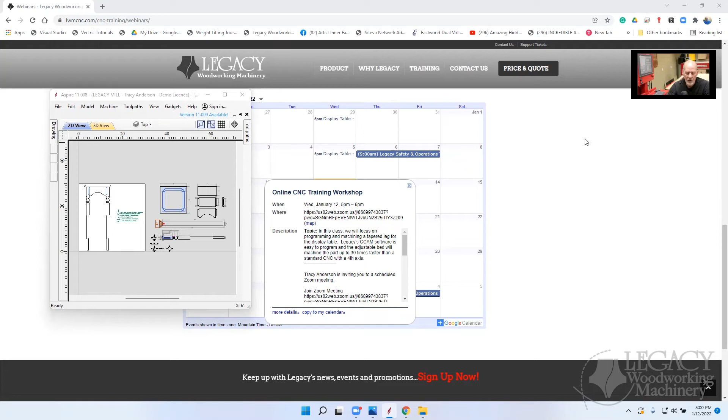Let's start by opening our drawing, which I saved as a DXF file. Let me check the class review page - right here in the last class, class number 3. This says 3 of 3, but actually these need to be retitled as 1 of 5, 2 of 5, 3 of 5. We're on 4 of 5 tonight. On 3 of 5 is the display table DXF file, so you can open this up in any CAD program.

The display table CRV file is in the latest version of VCarve Pro, so some people couldn't open it, so we do have a DXF that'll work for you. I've also got an export here, but I wouldn't bother downloading this one now, because I'll download a new export for the next class that has everything we do up to tonight's class. So let's go ahead and take a look at the project.

Just to recap what we've done so far: we focused first on the joinery, where we machined the square end and cut the mortises, showing off the mirroring capabilities in CCAM Pro that Mike put together for us. We've also worked on the tenons here on the rails, and did an overall drawing and setup, establishing the program to begin with in CCAM Pro.

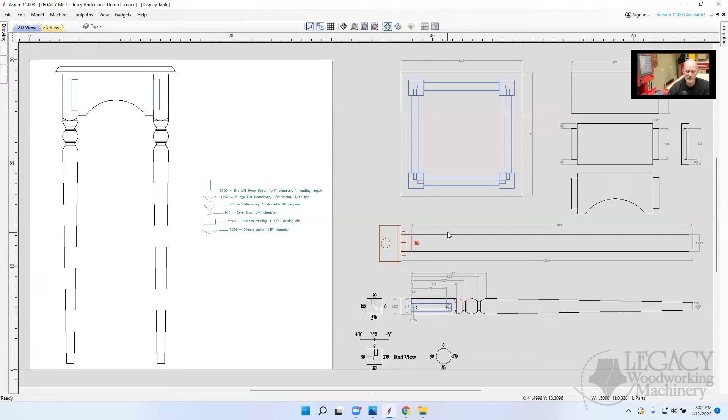Tonight we're going to follow through with the turning, doing the lamb's tongue and the bead here at the top, and then a taper. We're just going to focus on that tonight, and in the next class we'll come back and import files for cutting the arches and maybe even the tabletop, so everything will be organized into the project in CCAM Pro.

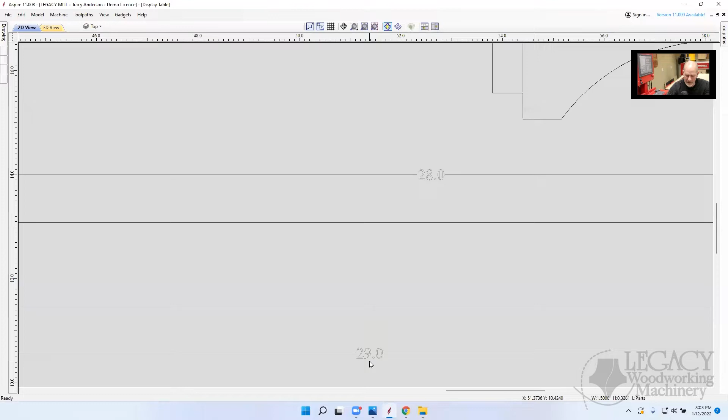Just a reminder that this is a drawing of the 4-jaw chuck and the blank, and I've moved the X0 from the end of the blank, not the jaws, out 1 inch. In this case it says 28 inches from end to end, but the part is actually 29, so we're making it 1 inch longer, we'll burn that inch, and cut it off.

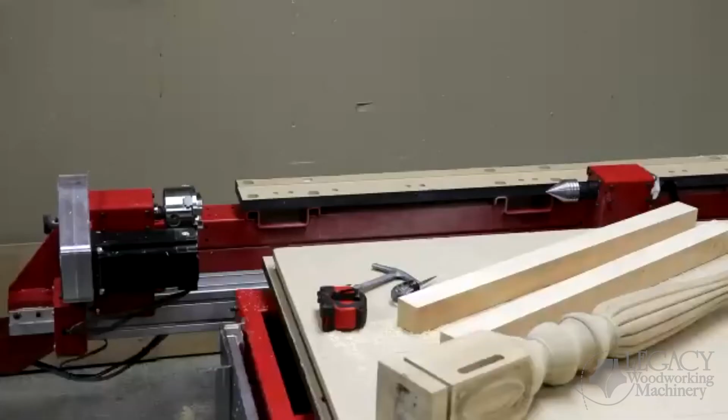Now I'll show you real quickly - unfortunately for tonight's class, let me stop sharing real quickly. You can see the part here, and this is just a couple sample blanks I had that we're doing all our testing on.

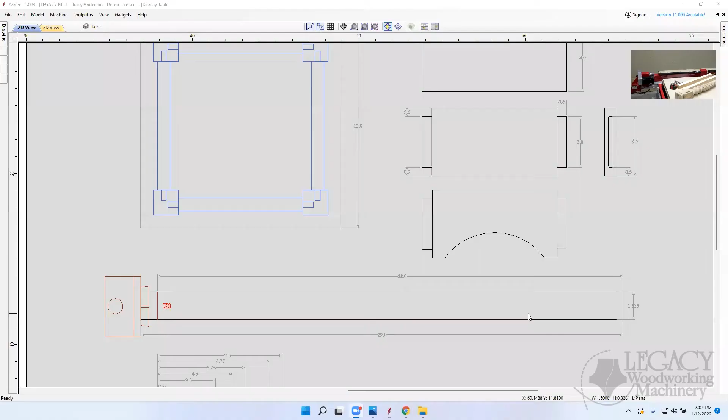So I'm going to measure that - it's about 26 and a quarter inches long. We're going to test everything on this part tonight based on 26¼ minus an inch, so we'll say it's 25¼ instead of the full 28. That's the leg, this is a sample leg, it's going to be shorter, but that's okay for demonstration and testing purposes. Once we get everything worked out, we'll come back and make this out of something like walnut or a nice hardwood.

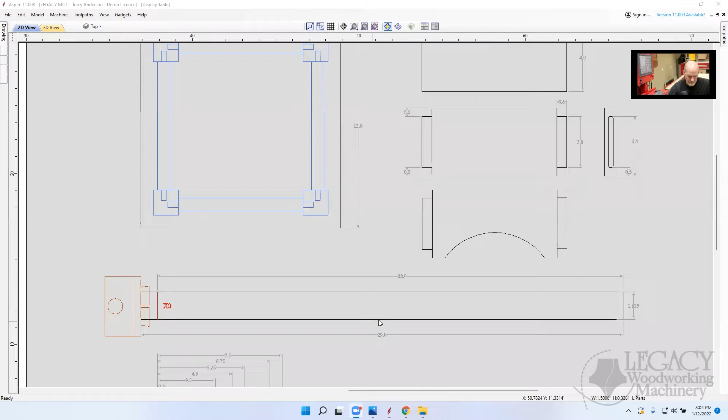Let's go ahead and take a look at the drawing right here. I apologize, this mouse is way over responsive, it's going to drive me crazy. Go into Windows settings and change the sensitivity of your mouse - yeah, I'll have to do that, but I'm not going to waste time on it right now. I'll fix it before we do this again.

So here's what you remember from class number 2: we machined from 0 down to 7.5, this end right here, machined it square, and cut the mortise. Tonight we're going to work from this point down to the very end. We're going to turn it round, cut this first section, cut a tapered section, then cut these two beads, and then do a lamb's tongue. That's the process for tonight.

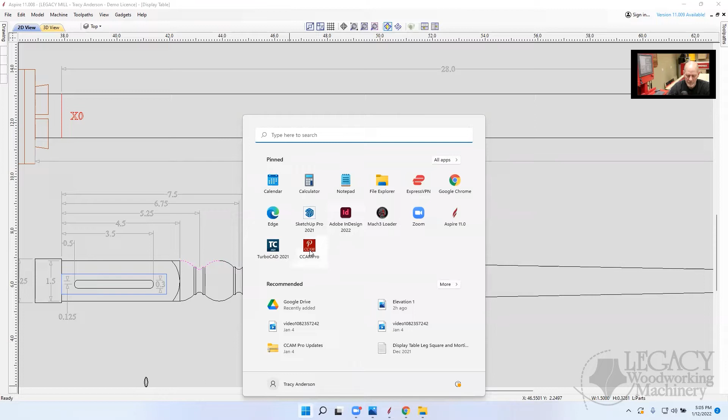Let's go ahead and open up - looks like I don't have it open right now. Let's open up CCAM Pro, and go into projects, it's the display table. If we look through here, there's the joinery we did last week - here's the leg, we've done the multi-sided square and cut the mortise. So let's add the next section. Once we're highlighted on the blank, we click up here on Manage Toolpaths and add a toolpath - this one's going to be turning round.

To be honest with you, you and I are kind of learning and testing this together. So as we go through it, if we find surprises, we'll make notes and pass it along, see if we need to make any corrections or improve the system at all. But Mike's done a heck of a job on setting this up.

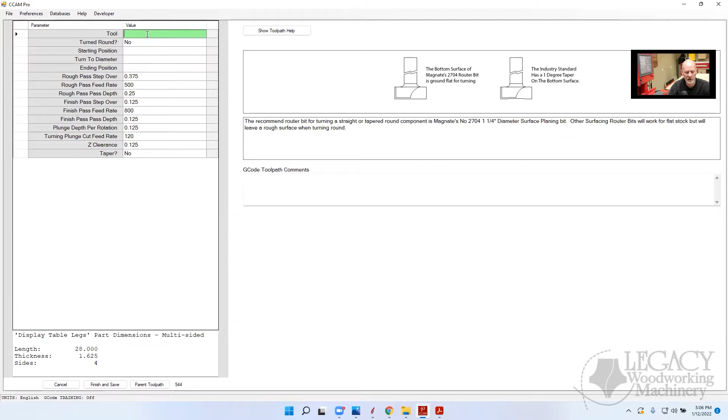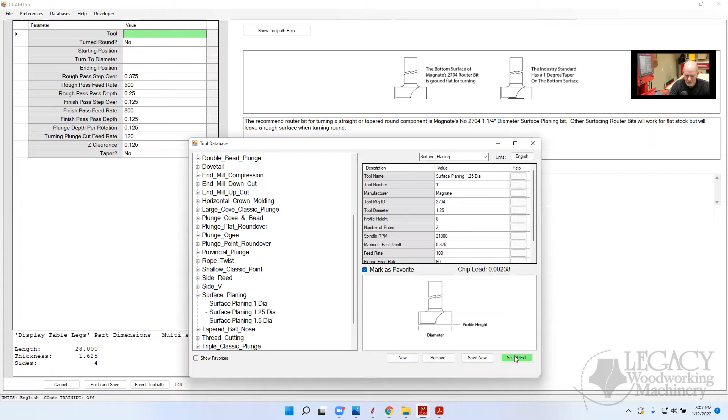You can see this one right here says that we're going to recommend this cutter because it's flat on the bottom, where the industry standard has a 1 degree taper. So that's the cutter we're going to use. It's under surface planing, the 1.25 inch cutter. We'll select that. Last time we used it, it was our number 1, and that's what's in the tool database, so we'll go ahead and use the default out of the tool database. And it's not turned round.

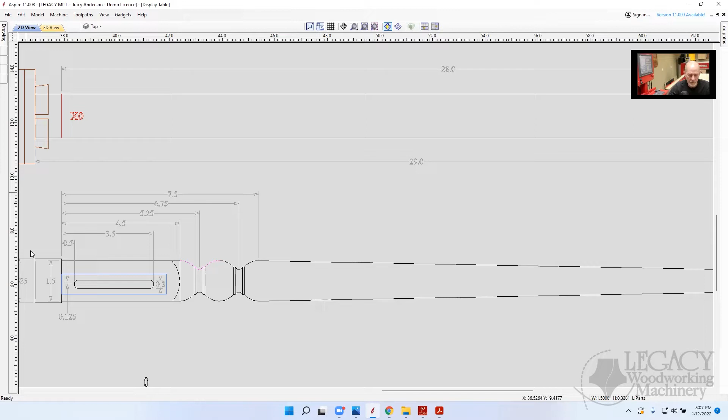So what we're going to do is start right here, let's open up the drawing and take a look. We're going to start at 4.5, and cut down to... what did I say, 25.25? Let me double check that real quick.

Right, we're going to start at 4.5, and get down to 25.25. So the starting position, 4.5. And then we're going to turn this to 1.5. Then we're going to end this at 25.25. Our rough pass step over, 0.375.

Our rough pass feed rate is 500. I could even push it up higher than this. While we're cutting, we'll probably just increase the feed rate on the fly as we cut. We'll leave it at 500 right now, so if you use this, it won't be moving too fast and you'll feel more comfortable. Once you get used to it, you'll be able to push those numbers up.

Rough pass depth, okay, I'm going to make this 0.375. We can hog off the material pretty fast. Pass depth, yes. Finish pass step over is going to be 1/8 of an inch, and we're at 800 inches a minute. This one we're going to set at 0.125 for the depth of the final pass.

All right, now we've got our plunge depth. In fact, if we set that deep enough, we might be able to do this all in one pass, but we'll leave it as a rough pass and a finish pass. Plunge depth per rotation, 1/8 of an inch is good. I'm going to speed up our turning plunge feed rate.

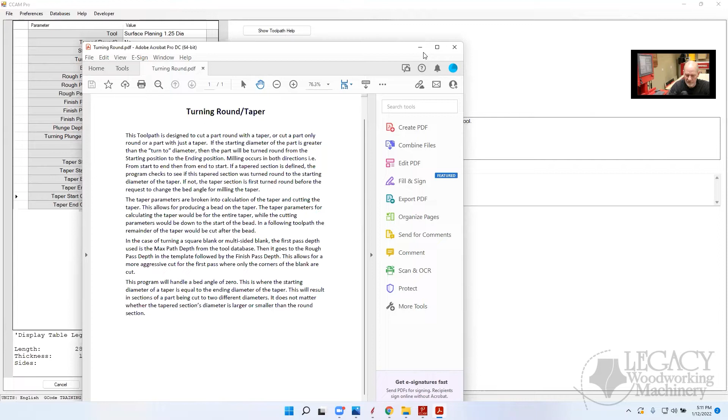In essence, what's happening here is that you can say it's tapering from point A to point B. Let me bring that drawing back up and illustrate. You could say the taper is from this point down to this point, but you might only be cutting the taper from somewhere out here to somewhere here. So you can define the actual overall taper, but only cut a certain section. What's cool about this is you can have this taper set up for one taper and cut down here, then cut a bead or something on here and finish the taper. This is a very powerful concept that Mike's put together, but let me show you how to use it.

Is the ending taper position actually 25.25 or does it go down to 28? It's 25.25. The reason is because when I measured this particular blank, this isn't the real part, it's just a trial. Because I measured this part and it's not a full 29 inches long, we can't cut 28, it's only 26.25. So I'm using the numbers off the part, not off the drawing. We'll come back, and when we make the real thing, we'll use decent hardwood, and we'll make it 28 inches, and the part will be cut 29 inches long. Does that make sense?

Now here's where he asks, where's the start cutting position of the taper? Over that overall taper, do you want to start right at the very beginning, or do you want to start further down at a different location? If we look at our drawing right here, we started right here at 7.5, and we're going to start cutting the taper right there as well. So this is going to be the same, 7.5. Then the taper end cut is going to be 25.25, so it'll cut all the way to the end. This is pretty awesome, because it's going to turn it straight around.

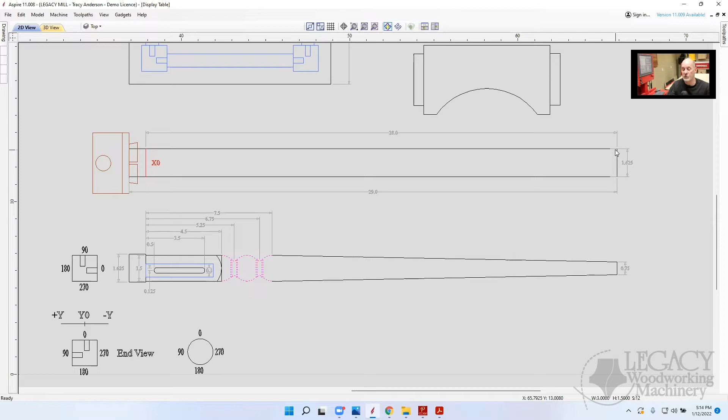Tracy, should your length be 24.25? You have an inch that's up there by the chuck, and you're right. Yeah, you're absolutely correct in theory, but here's the difference. On this drawing, the blank was a full 29 inches long, that's what we actually drew it as, but I don't have a 29-inch blank. My blank is 26.25, so I said okay, let's burn this inch at the left-hand side. We're going to start at 0 here, so we'll really only have 25.25 inches of length to cut. I'm sorry, I thought your whole blank was 25.25, but you say it's 26.25. Right, okay.

Then our section diameter is 1.5, that's what we turned that down to. So that first straight section is at 1.5 inches in diameter. Now we need to see where we're going to cut this in the x-axis. I'll zoom in a little bit here, maybe not too much. All right, so the center of the cut is right here, and that's at 5.25, and then the second one right here is 6.75.

So we'll put 5.25 in here, and we're going to use a comma and put 6.75. That's another feature Mike's built into this - you can cut multiple cuts using the router bit profile simply by separating them with a comma, just like we did on the two sides with the mortises.

This is asking for profile height. If you're not sure what that means, it explains it right here: the profile height is the parameter of the tool table that measures the cutting depth of the actual profile, from the tip of the cutter up to the shoulder. It's already in the tool profile, so you don't need to know it or enter it - you don't have to enter how deep to cut, you just say use the profile height. Simplifies things a great deal.

Plunge depth per rotation, 1/8 inch is good. We'll climb mill on the left-hand side - that's excellent. Feed rate, I'm going to speed this up a little bit, maybe 150 inches a minute. We could probably go even faster, but we can play with it. We'll go there. Clearance is going to be 1/8 of an inch.

And this section, if we go back and look at the drawing, is not tapered. So we didn't taper this first section right here from 4.5 to 7.5 - we left that straight, and we started the taper at this section and went down. That's why the taper is no.

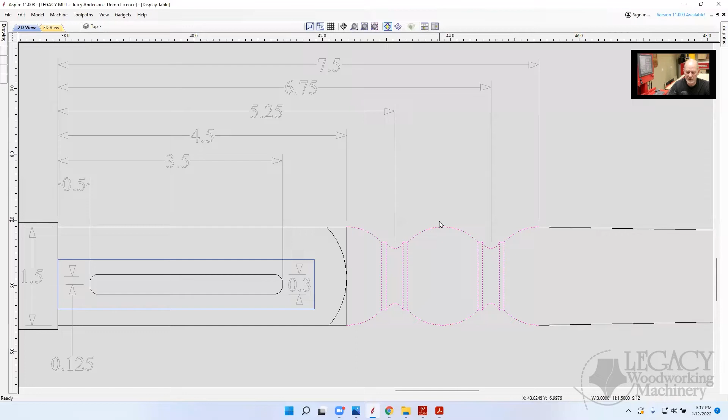Now, this is the router bit profile right here. So when we're looking at the part, the headstock is at this end, but when we're looking at it from the front of the machine - which remember is the end I'm at - the front is the other side. Then you're looking at the blank like this. So the left is this side, and the right is this side of the cutter.

One thing to keep in mind is anytime you can climb mill, you're going to produce less tear out - you're going to minimize your tear out. Conventional milling or up cutting is cutting, and it's tearing the grain out in front of it, so it can rip things up. In this case it may not matter at all because we're going to do a lamb's tongue, although right here where the lamb's tongue meets this edge, that could possibly create a problem.

So we're going to climb mill on this first cut on the left, and we're also going to climb mill on the second cut on the right, because this all disappears - we don't have any shoulder here that we're messing with. So I left them both as just the left, and it's good to go. Thanks, that makes sense? Yeah. All right, let's go back in.

So the last thing, I'll go back to the drawing. We've machined it round the full length, we've cut the taper from 7.5 down, and we've cut these profiles to form this bead. The last thing is the lamb's tongue right here.

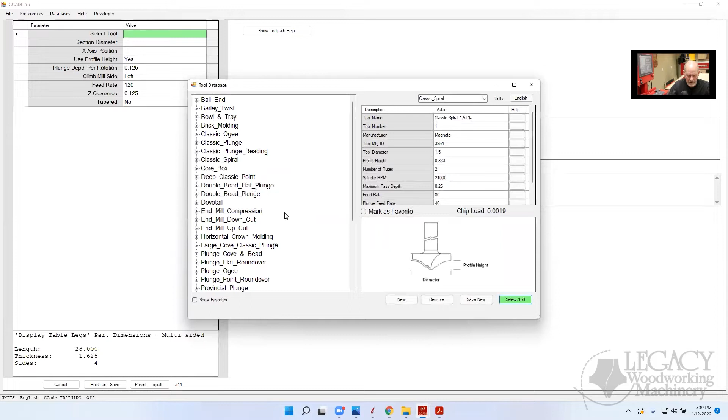The cutter we're going to use - I'll click on that, and we're going to go all the way to the bottom to V bits, and we're going to use a 90-degree cutter. The one I have is actually not 1 inch in diameter, but that's typically what I would use, so that's what I'm going to put in here, and we'll select that. The last cutter that was used was 4, so we can go ahead and say yeah, that's the tool we want.

So 1 is the surface planing bit, 2 is the end mill, 3 is the classic spiral, and 4 is the V-bit - it's the last one. If we added another bit, for example, I would like to play with this - I didn't have time to experiment, but I want to cut some flutes in the tapered section, and Mike's developed some really cool tools for that. So we'll come back to experiment with that as well, but we're just going to use 4.

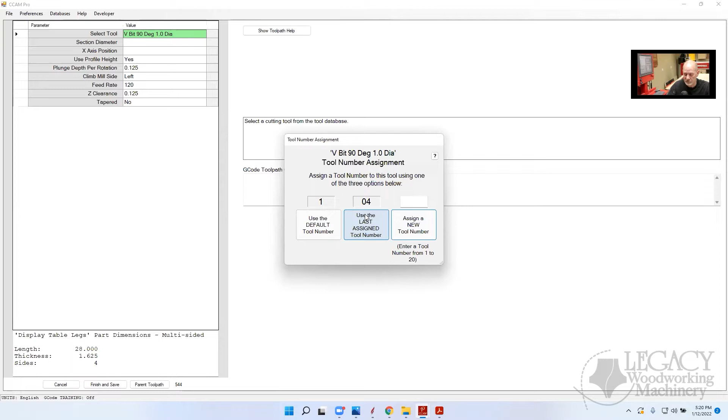And when we cut flutes, we might use tool number 5. So we'll go ahead and use 4 for now. The section diameter here is 1.5, so let me go back to the drawings to explain this.

Okay, so this has all been turned to 1.5, and this square is 1.5. So that's the diameter of the stock.

Now let's go into the x-axis position. If we take a look here, the center of the bit's going to be right here at 4.5 inches, right at the end of the square. So we'll put in the 4.5.

Now it's asking, do we want to use the profile height? The answer is no, because if we did, your V-bit would start here, and then it would cut down into here, whatever the profile height of the V-bit is. At this point I don't really care, but we're going to say no, do not use the profile height. It's asking, well, what is the cut depth?

I noticed one thing, I haven't had a chance to test this and I'll have to do more testing, but when I was turning round and it was already round and you said turn it to the same diameter, it didn't turn it because it was already there. So it didn't produce any code to turn round, which caught me by surprise, but it makes sense. If it's already round to that diameter, there's no need to cut it again. So even though you put it in, it just skips the code, it doesn't produce any G code to do that.

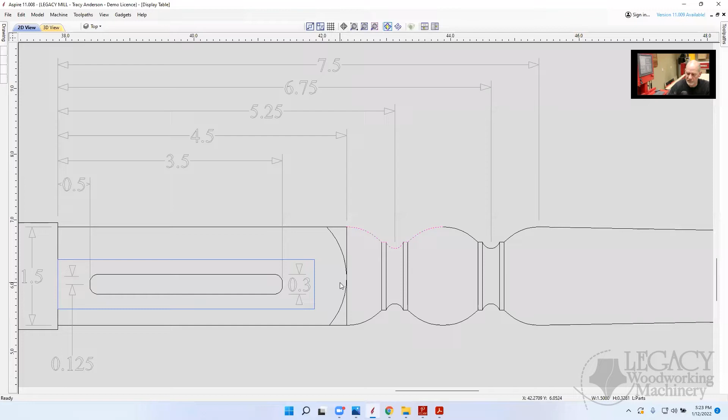But right now we're going to set it for 1/1000th of an inch. Plunge depth per rotation, that's fine. Climb mill side, okay, this is the same thing. Our cutter is right here, the V-bit, and we're going to climb on the left side because we don't want to tear out this grain right here from the square against that shoulder. So we're going to leave the climb mill side on the left. Our feed rate, I'm going to push it up again to 150 inches a minute. Our Z clearance, an eighth of an inch, and our taper is no.

Okay, it's just the bed's all level and ready to go, so finish and save that. So now what I have here is the multi-sided. I've got a mortise, I've got turning round, I've got turning with the tool profile to cut the beads, and then I've got the lamb's tongue that we're going to cut right here.

If we generate all this G code, of course it'll cut everything. Now, in the past we tested the first section, surface planing and the mortises, but I don't have that piece, I've got a brand new part. So we're going to recut everything while we do this part.

The one thing I want to show you here is after it machines square and does the indexing mortising, then it does the turning round, and it has a pause right here. This is an M0, this will pause the program, and then you'll be able to see in the line it says set the bed to 1.2 degrees, which is the way we used to do it, which is not very accurate. Or you have the option of 19.4 turns of the handle, which is the most accurate, or you have 1.94 inches, that's the elevation you're going to raise. So you can use any of these three measurements to set the angle, but the most accurate is the number of turns.

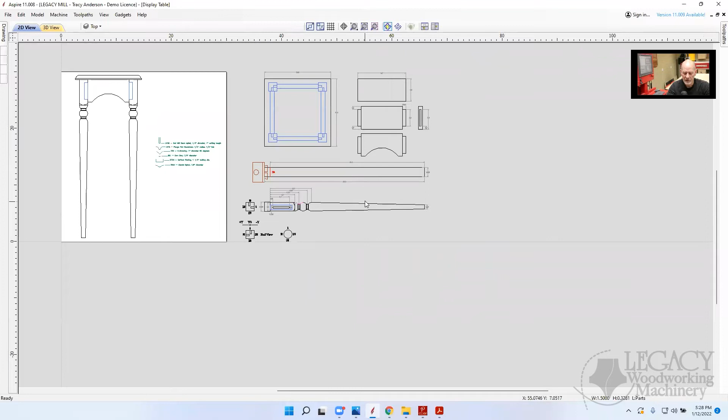So the way it's going to work: let's say our taper goes from this point, 7.5 down to 25.25, or in this case 28 according to the drawing. But you're only going to cut from this 7.5 down to a location here, maybe 20 inches, then come back and make a second profile. You'd still use the taper at this position, 7.5 at 1.5, and down here the ending, but you'd start it past the bead and end it here at this end. Then you could come back and machine the bead or the detail in that section that's left. It would be two tool paths.

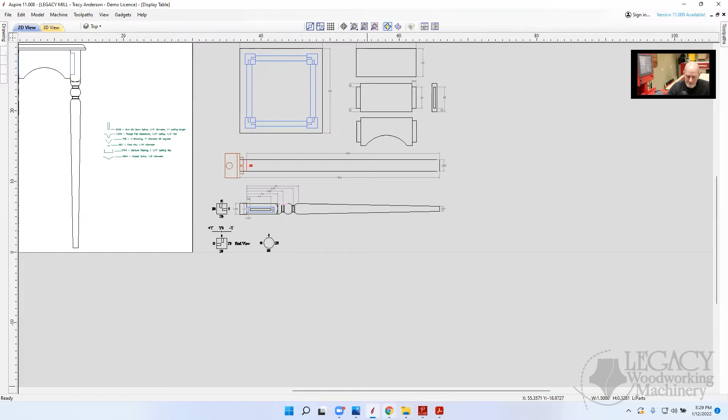Great, all right, hey thanks Mike. Let's go back in here then, and we're going to save our G code.

We're going to call this the display table leg, and I'll put 25 inches on here, because I know this isn't the right one, but it's the material I had. So I'm putting that in so I know it's not the proper program. If I go to run the real wood, I'll have to create one with the proper dimensions. All right, and then we'll go ahead and eject this.

Okay, so I'm going to insert right here, and I've already homed the machine, and I've clicked on the turning workstation. And so I do not have to do a smart tool setup because we're turning.

I've also created one offset here. I have 5 offsets in the turning. The first one is called 4-jaw chuck, and it's right at the end of the jaws of the 4-jaw chuck, but we didn't like that. So the second one I called 4-jaw chuck 1 inch, just to let me know that this is going to be 1 inch from the end of the wood.

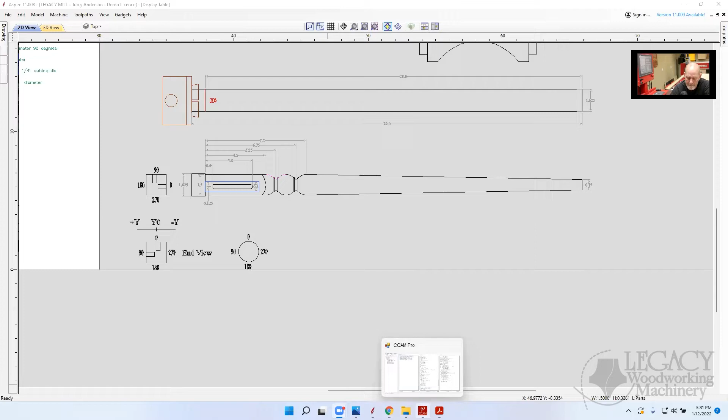Now that brings up one other issue that you need to be aware of in order to get tapers correct. I'm going to go back into Conversational Cam Pro. And if we go to our database for the machine database, I'm using the Gen 3 of the 4x8 auto tool change.

And right down here, you have some values for the pivot height, 10.25. You have the pivot lift height, 8.526. You have the pivot length start. And you notice that my number right here is 1.9 inches.

Probably the best way to do this, because this is actually measured for this 1 inch offset. Remember, when you change the starting point of the part, then this value is going to change, which will affect your calculations. So what I did is I took my laser and pointed to the pivot point, and then I went back to my X0 on my turning blank, and then I went forward to the center of the pivot bolt with my laser, and it was 1.9 inches. So I changed the value that was in here to 1.9.

So this is one thing that you'll want to check. And we have on our website a video on setting up these values for your machine. You'll want to double check these values to make sure they're accurate. Otherwise, your tapering will not come out correctly.

Okay, so I did 1.9. Now, in reality, what I should do is I should probably change the name of this guy up here to 1 inch and say save new. So now you notice that I have a 4x8 Gen 1 with 1 inch from the 4-jaw, and I could rename this one 4-jaw chuck or something, so that way, if I'm not using the 4-jaw chuck, I could go back and use this one with the original values. If I am using the 4-jaw chuck, I simply come up and use this one and generate all the code. So this is one way to create basically a post processor for tapering that is determined by where your x-axis starting point is.

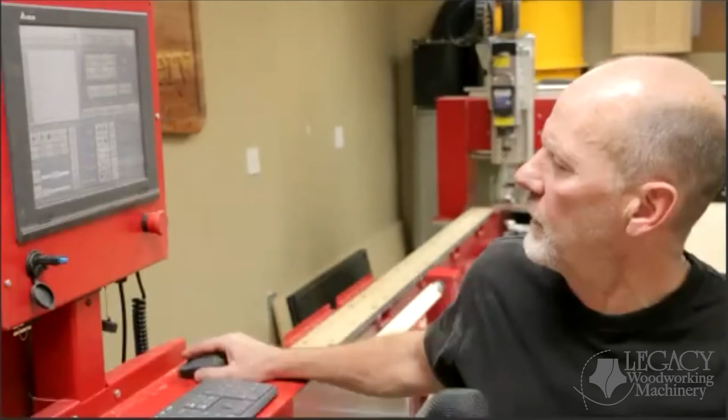All right, now what I'm going to do next is, that part's obviously not ready to start cutting. Let me double check the code. I'm sure this does this, but when it starts, it sets the A-axis to 0. So you don't have to set it before you start running the part. Wherever you have the part set, it's going to lock it at 0.

So we just want to square it first, and then we'll go ahead and run the program.

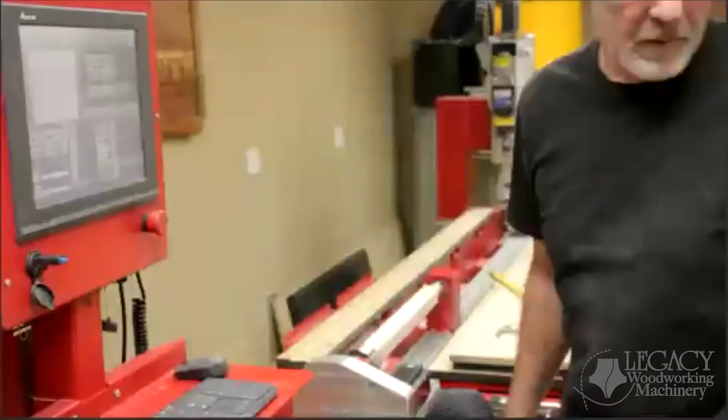Okay, so what I'm going to do is just put a blank across here. I'm going to put it in step jog, but we're doing it in degrees now, so I'm going to set it for 1.0. Every time I click it, it'll go 1 degree. I can change that and make it a half a degree or whatever I want. But if it's 10 thousandths of a degree, you will not see anything move, and it'll take forever. So we're going to set it to 1.

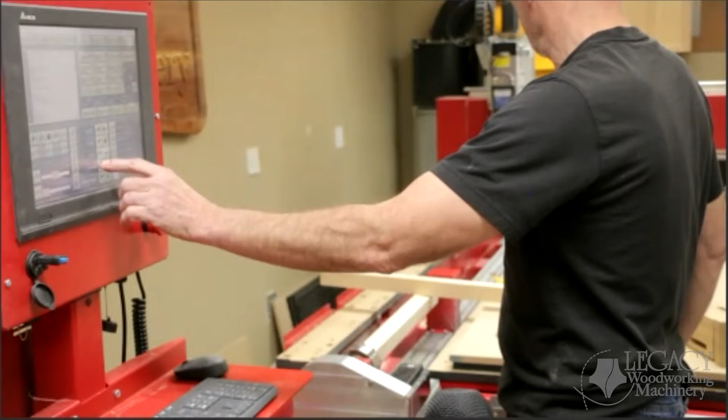Tracy, is there a way to do degrees in Mach 3, or is that just delta?

In Mach 3, there's not, well, technically you probably could. You have the settings in the config, the general config of Mach 3, where you can actually assign the steps to the digit. So you could set 1 to 1 inch or to 1 degree, but it would still be 1 inch on the display. It wouldn't read that on the screen. It'll still read 0.1, 0.01, and 0.001. So it won't read accurately, but you could kind of fake it out and tell it to move that way.

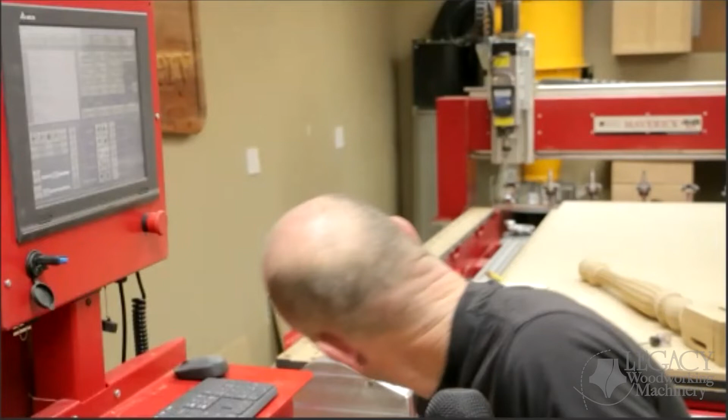What I typically do in Mach 3 is I simply slow my rotation way down, the percentage of the feed rate. Then I can just bump it normally, but it's going to rotate very, very slowly. I might put it at 2% or something, so it's barely rotating instead of step jogging. But in here, I can just rotate it. Now it's hard to see right there, but you can kind of see that part is pretty flat now. And I'm measuring it against the tailstock.

You can actually measure against the table, kind of compare it. And so this looks good. I'm going to resurface the material so it doesn't have to be perfect. You just want it close, and that's going to work just fine. So I've got it just so it's close. Now you could eyeball it without that piece on there. This just kind of illustrates, makes it easier to see. So I set that part up level with the tailstock or with the table.

That's all it is. Tracy, am I correct that every time you chuck in that 4-jaw chuck, the jaws are always going to load the stock in exactly the same place? In other words, if you were to zero that out right now, get it perfectly square to the table and all that, then do one of your turning offsets, set it to 0. Every time you chuck something in that 4-jaw chuck and you go back to your 0, it should be square to the bed, correct?

Theoretically, you are correct, Alvin. Here's the issue. When you home your machine, you're homing X, Y, and Z, so it finds the center, or at the end, the home position for that. But it doesn't find A, it just sets it to 0, wherever it's at, okay? So if you ended on A0, or 90-degree increments of it, then when you end it and start it back up, it will be set back up. But if you've rotated it and it's angled, it's not level, you turn it off, turn it back on, you'll have to level it back off again.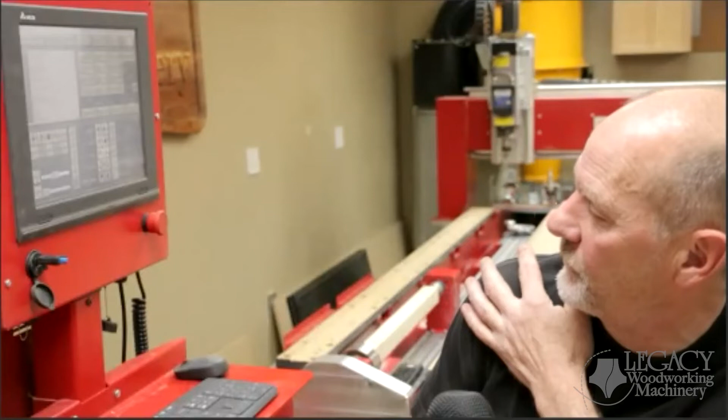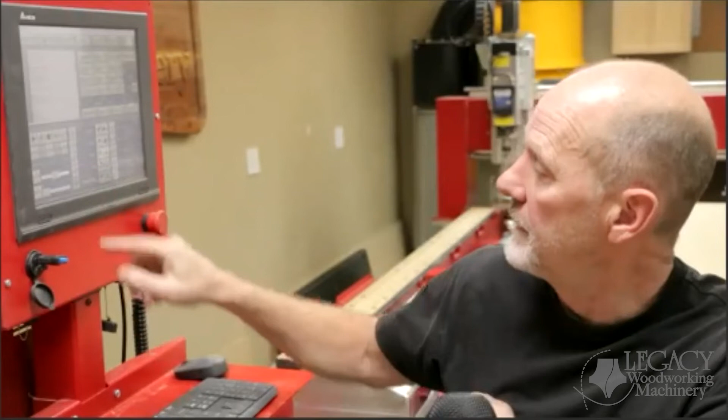Well, you can do, now I don't have a button for it, but you can use the manual data input. So right now my A-axis is reading 17,210.07 degrees, right? So if I said go to 0 now, that thing would unwind 17,000 degrees, okay? So typically we wouldn't do something like that. I could come up here and just click on the A-axis and 0 it. And now if I rotate it a little bit, let me take it off step jog. Okay, so I rotated a couple of rotations.

Now, if I use the MDI, which is the manual data input, and I simply put A0 here, and then I push on the execute. Okay, that's out of focus on that view. I'm sorry, but I'll do it again. If you rotate it, whatever, and then execute that MDI, it'll take it back to 0 degrees. Okay, so there is a way to do it with the manual data input.

So if I know I've got multiple turnings to do and I have to do them on different days, the machine's going to be shut down, all I need to do is 0 that before I shut the machine down. I'm good to go the next day. Yeah, that's the way to do it.

Now, one of the things that, and I'll need to get with Mike, but one of the things I was changing in the original conversational cam as I was updating the toolpath was I wanted everything to rotate in either 90-degree elements or multiples of 360 degrees. So for example, if you were turning around and it would say, I'm turning from point A to point B, and I'm going to have a step over, then it'll calculate how many degrees it has to rotate. It may not be a multiple of 360.

So what we were doing is calculating where it's at, calculating the difference and rotating it to that point. So we had it back to the starting point, 0. And so it might be wound up to some 30,000 degrees or something crazy, but it would be a multiple of 360. So if you simply started the program, it'll reset it to 0 right there and do the same things again. Okay, yeah, even in all the turning toolpaths, I go back to A0 by the time I finish the process. So you drive it back to A0, Mike? Well, I drive it to a multiple of 360 and then 0 the A-axis. Oh, same way, same thing then. Okay, perfect. All right, so there you go.

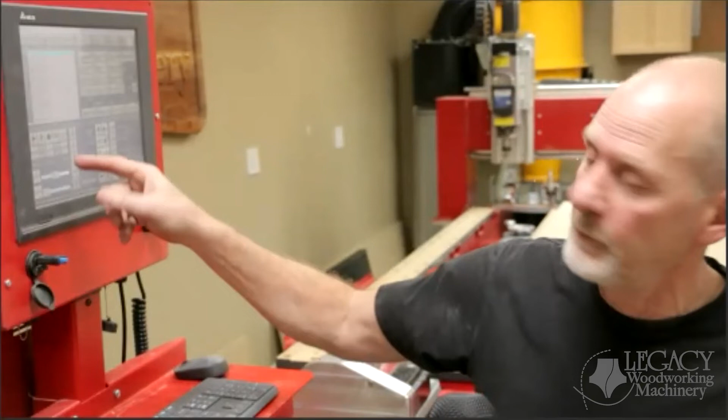That's perfect. All right, let's go ahead and set it up maybe this way. I'll start here so you can kind of see how it runs. Now, I already have tool number 1 in there, so it's not going to put a tool away or pick up a tool or anything like that. So I'm just simply going to press the cycle start button. It'll come up, touch Smart Tool, and then, if everything goes right and I programmed it correctly, we should be good to go.

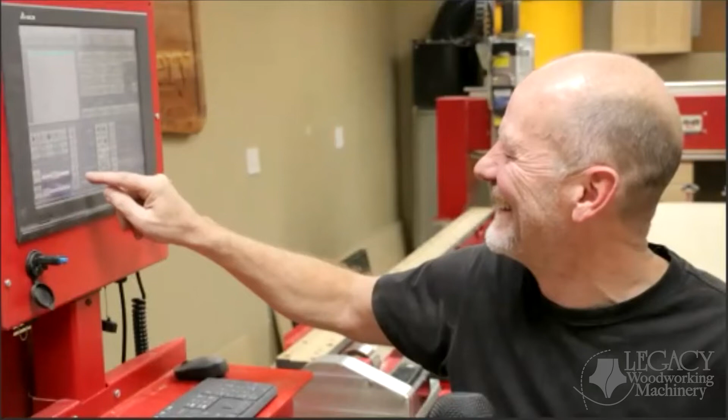Don't you just hate it when it does that? Yes, I do hate it when it does that. Okay, I got it. Wow.

I'm getting an error number 1, and to be honest with you, I don't even know what that is. Let me look it up here real quickly. Now you know how we feel. Like I say, we're learning this together. So I apologize, let me just look it up here real quickly.

Did you reference the machine before starting the class? I'll double check, but I'm sure it is.

Oh, that's interesting. Okay, wow. Error number 1 is file does not exist. So let me open this file. Oh, I know why, okay, I just figured out what I did wrong. I put the file in here, but I already had a file in, and that file's gone, and I did not reload this new file. So I just have to come in and go to my flash drive and select that file.

Okay, now this will work. It better work. All right, here we go. Yay.

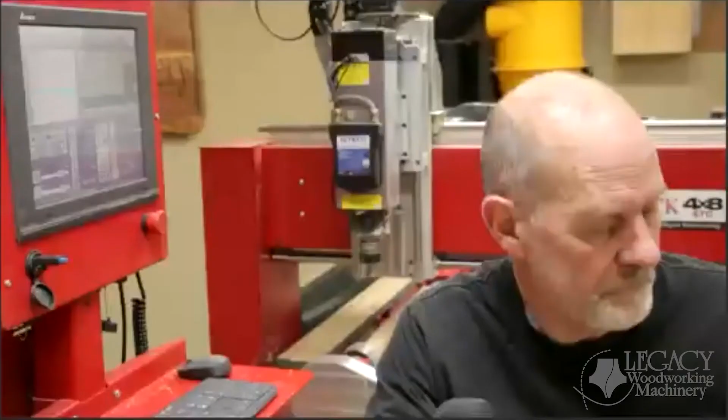Okay, I apologize, I can't hear you when it's cutting, so I could hear some background noise, but it's going to now change the cutter and come up, cut those tenons.

We solved our own problem, Tracy. You got it? Okay.

So we do have a little ding in there, but again, prototyping, we're okay.

Okay, so that's what we've already done, you've seen that before. Now it's going to pick up and do the rounding. And then that's where we'll have to adjust the bed once it's turned around.

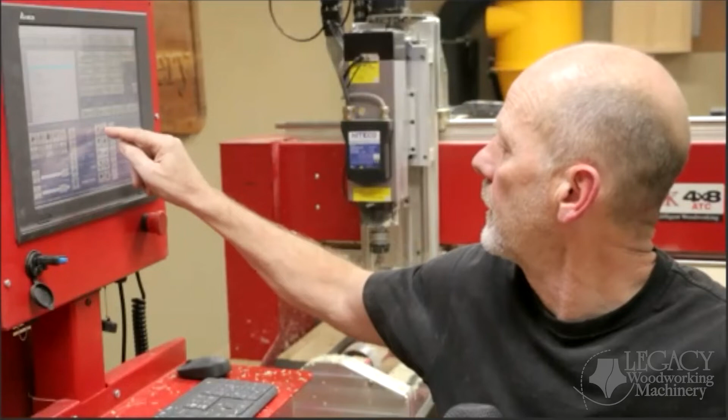Actually, I can't move it. I can't move it while it's paused, it's holding the program, so I have no control. So let me adjust this other camera so maybe you can see that adjustment. You can see the tip of the handle there. I'll go make the adjustment.

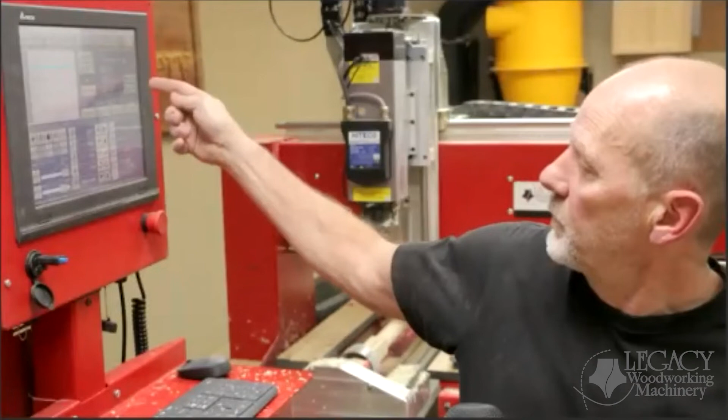And then at this point, again, it's just paused. Like in the program, it's actually got a screen here that flashes saying I'm in an M0, so you know that it's paused intentionally, waiting for you. And then you just press the cycle start button again.

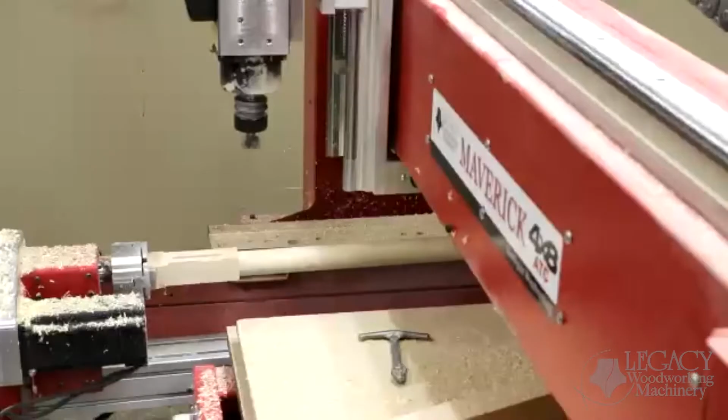Tracy, when it tapers, does it taper in both directions like it does turning around? No, I believe it just tapers in one direction from the headstock to the tailstock.

Tracy, what's the offset from the center, or the zero on the Y direction? It looks like it's cutting off to the outside. Okay, I apologize, I can't hear. As soon as it's finished, then I'll get back to it. I'll ask after you're done.

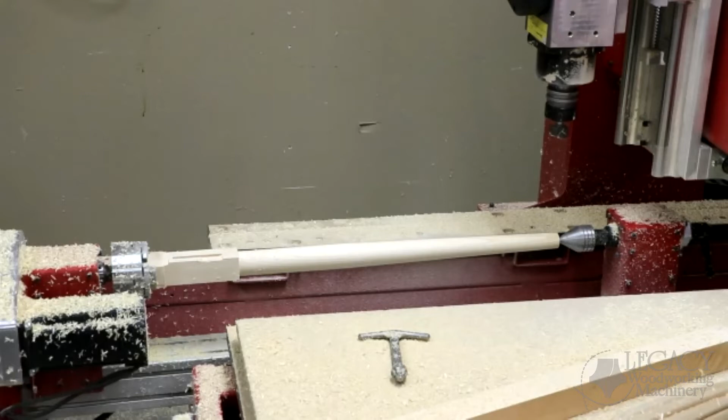Okay, now it's flashing at me saying I'm paused, waiting for you, and it says set the bed to 0 degrees. So I need to go back to 19.4. And you'll notice I'll go past it and then back up to take out any backlash. And I'll move the camera so you can see it again.

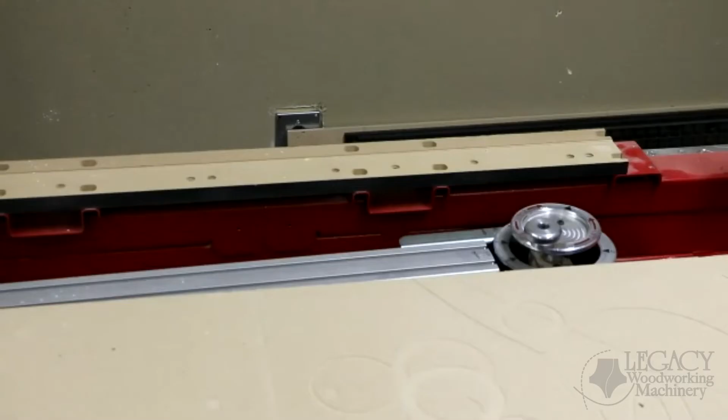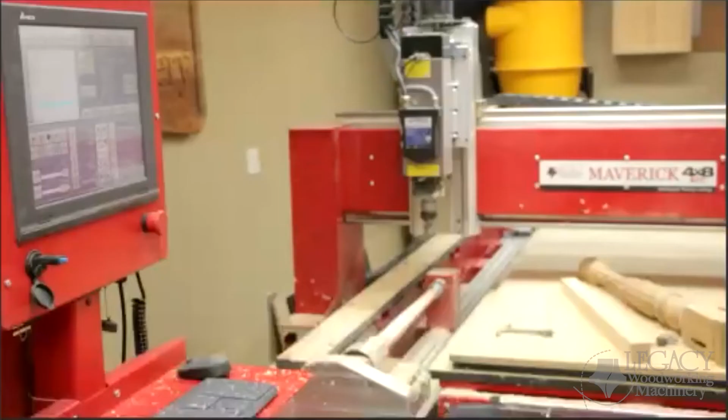Okay, what's the question? I thought that the taper would start and run uniformly down the leg, but it appears that it didn't. It started later, further on down the leg. Yeah, that's what I've noticed too. It should start just 3 inches down from the flat, and it looks like it's starting at probably about 5 inches.

So what I need to do is go back and double check my calculations for my bed settings. When I went into the machine, I said, you've got to check these values. I'll go back and check, Tracy? Mine and see. Yeah, what I do there is calculate what is the maximum depth of cut by the time I reach the end, then I back up the x-axis to give me that cut on that taper.

You see what I'm saying? Right, so if the depth of cut, whatever the maximum depth of cut is, say it's 1/8 of an inch, I back it up to the X position that would give me 1/8 of an inch by the time I reach the end of the taper.

Oh I see, okay. I'll have to get with you Mike and break into the program to look at the calculations. The one thing I noticed on the original one, I calculated how many passes it would take. In this case we did 2, a rough pass and a finished pass. On my rough pass I wouldn't start back at the very beginning, I'd calculate where it would start in the middle. It didn't look like it did that in this project, so I'll need to get with you and go over the math and see if we need any updates or changes. But that's the basic idea.

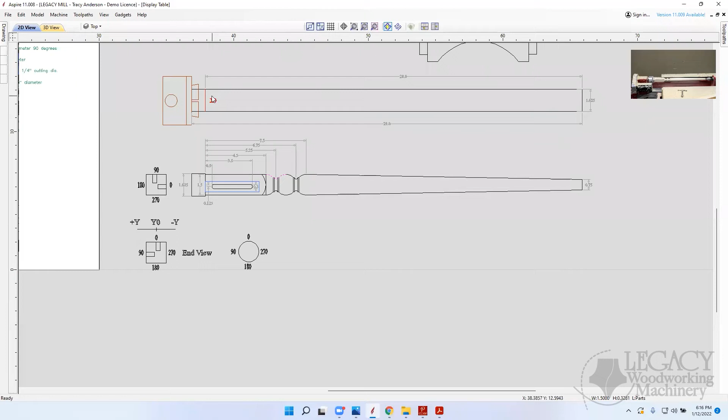I'll share my screen and show you the part. I'll do it with the drawing so you can see it. Okay, let me zoom in here a little bit.

Here's my X0, and I programmed it as a positive number, so the pivot point was back here. Can you see my mouse here on this screen? Yes. Okay, so I said the pivot point was back here, 1.9 inches. In reality, the pivot point is up here, 1.9 inches. It's down below, but it's out in front. So this is a negative 1.9, not a positive 1.9. That's why it pushed everything down.

That's 3.8 inches and cut to a larger diameter, because it had shifted everything down since I had those starting positions incorrectly. Does that make sense? Yes, it does.

How does it become a negative if it's to the right of the chuck?

Okay, so here we're looking at the machine. From here, it's actually left of the chuck. The starting point is out about where the mortise is starting - that's actually about the pivot point. So from there, instead of moving to the left, which would be a positive, we're going to the right, which is really a negative. Everything to the left in this picture from the pivot point is positive, everything to the right is negative. I had a positive instead of a negative number in there, and that's what pushed everything down and screwed everything up.

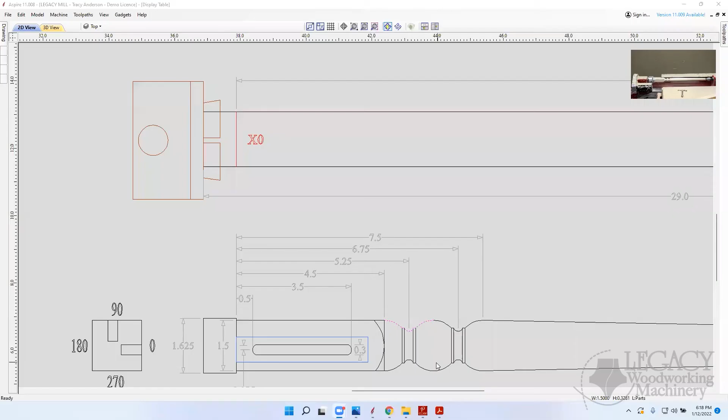Do you have that drawing handy, Tracy, of the pivot point, how you measure everything? Let me look on our website here.

It seems backwards because when you go that direction on the horizontal table, you're going plus numbers. Down further, down further - I can't remember how far back we did this. I just looked at that not long ago. It's an early one, how to set up that axis. Oh yeah, it's way back. Wow, I didn't realize it was that far back. Now you're getting there, there it is.

Machine settings. Okay, let's look at the machine settings PDF. View the machine settings - I'm going to download this PDF and we'll take a look at it. Here you go.

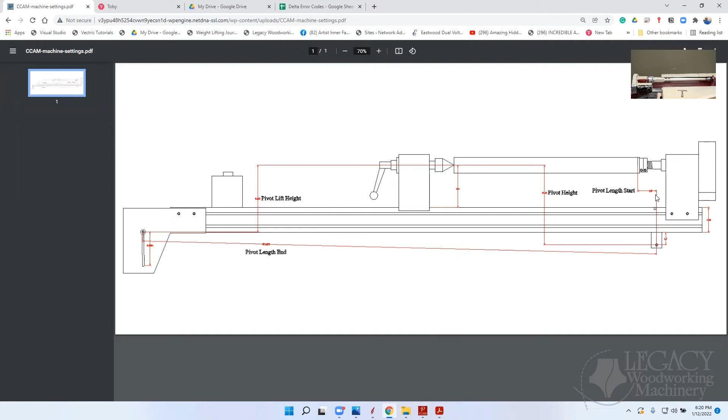This is the machine, of course, looking from the back side. So here's the pivot point. Can you see my mouse on this screen here? Yes. Okay, so this is the pivot point, and this is on a Maverick 3x5. Let me see if I can zoom in here.

So from this point, everything is measured in this direction. My distance right here is to the left, so this is a positive number because again from 0, everything going this direction is positive, everything going to the right is negative. Since my pivot point is actually not back here but up here farther, that negative from this point, going back, is a negative starting point, not a positive starting point. Does this drawing help? Does this make sense? Yes.

You're not saying the pivot point is a negative, you're saying the starting point is a negative from the pivot point. You got it, that's right. Everything's measured from the pivot point. Again, on the 4x8, it's a positive number - I accidentally put it in backwards. So if you've got the system in a 4x8, go look, it's going to have a positive number because I put it in backwards. You're going to have to change that number to a negative. I just realized this, and I'll have to make an update to all of our files.

When you cut the taper, you seem to offset in the Y in a positive direction, so you went to one side. Is that correct? Is that a step over of a certain amount that CAM calculated? So when your bit comes down, as it starts turning around, it moves the Y - is that what you're asking? Yeah, both on the turning and also on the taper. Yeah, that is exactly correct.

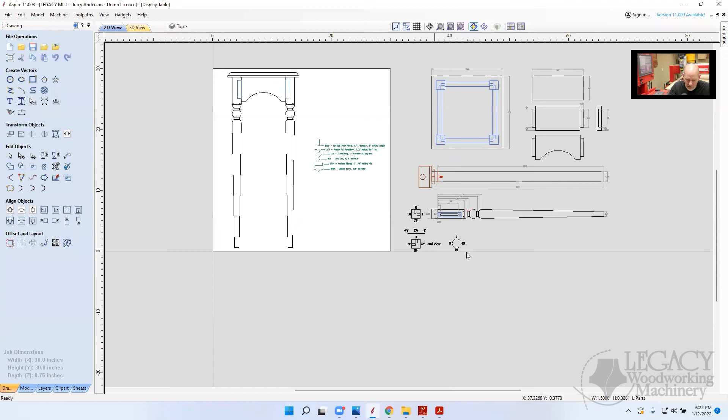If we look at the end view of the part, let's say this is the turning around right here, and your router bit is something like that.

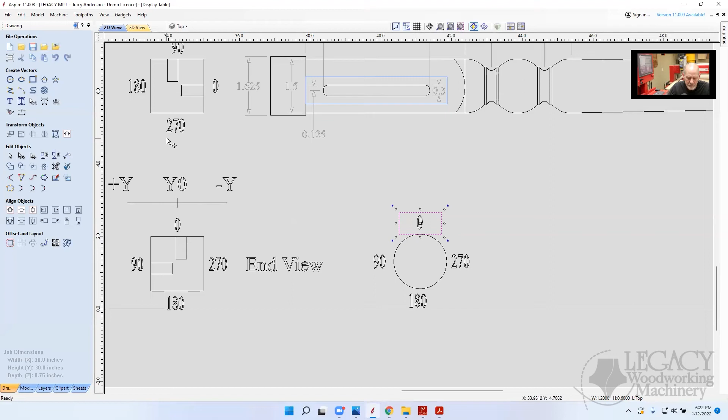So when we first start cutting, we put it right centered over the part, like so. That's at zero. Then what we do is when we go to cut along the length, if it's sitting in the center like this, maybe I can do it this way too.

If you're looking from the top view, and let's say your router bit's right here, zoom in here a little bit. So you would only be cutting with the center of the bit versus cutting with the side of the bit. You can see when it is centered down the center line like this, it's only cutting here at the left and right here at the right, and it's cutting cross grain, so it gives more marks.

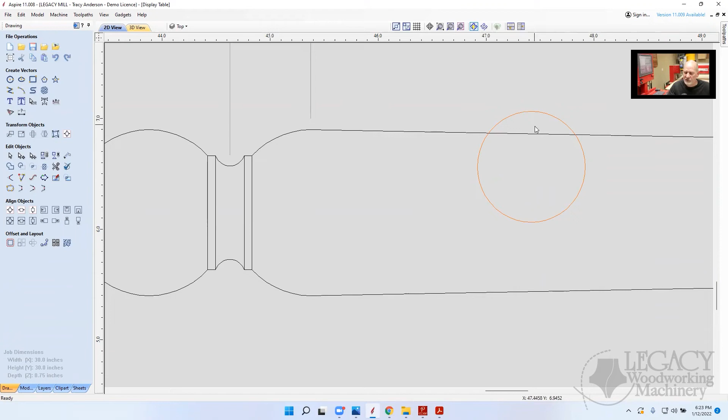So what we do is we take this and push it over here, so it's just barely overlapping about 1/8 of an inch of the center line. Now it's cutting this direction, and we're actually climb milling that cut along the length. That's why it moves over when we start moving along the x-axis.

So both ends are going to be centered like so, but before it starts moving down, it's going to move over. In essence, it's like a small step over, but it's cutting when it's all the way down. It makes sense to me.

What we're trying to accomplish here is that we're trying to minimize tear out. So we're climb milling everything, and we want to cut with the grain whenever possible, and that's why we offset. It solves those two issues.

So Tracy, I didn't notice, but when it comes back the other direction, does it rotate counterclockwise then, or the other direction? Yeah, it'll switch to the other side. When it's cutting back from the tailstock to the headstock, it moves to the opposite side, so it does it.

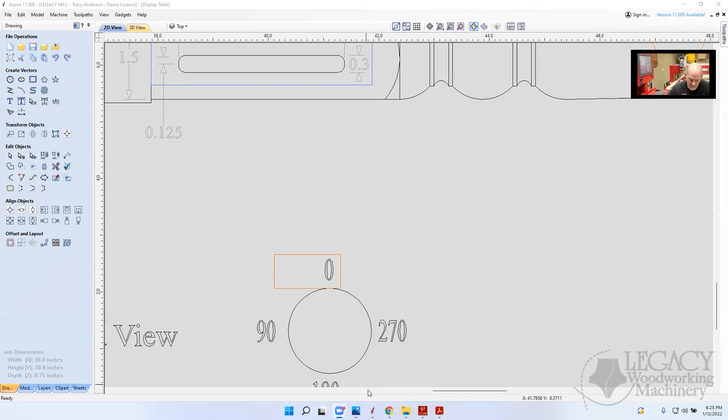So let me show you one other thing. I'm going to share my screen again real quickly and show you one other possibility. So we're going to go here. Now this is the PDF. You can download from our website also the machine settings, the CRV file. And so if you do that, you can open this up in Aspire or VCarve Pro.

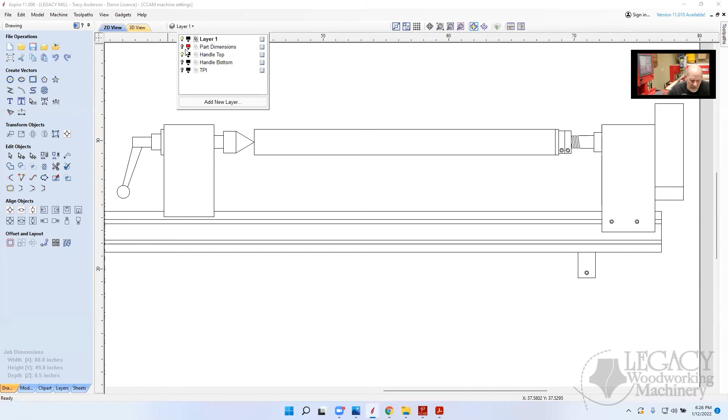And so you can now, oh, I thought I took the dimensions in here. Maybe I did. Handle bottom, handle top, part dimensions. There we go. Okay, so they're in layers, so you can turn them on. So in this, you can zoom in and see the numbers real clearly. The PDF is not so much. So download this file, the CRV file, and then you'll be able to see.

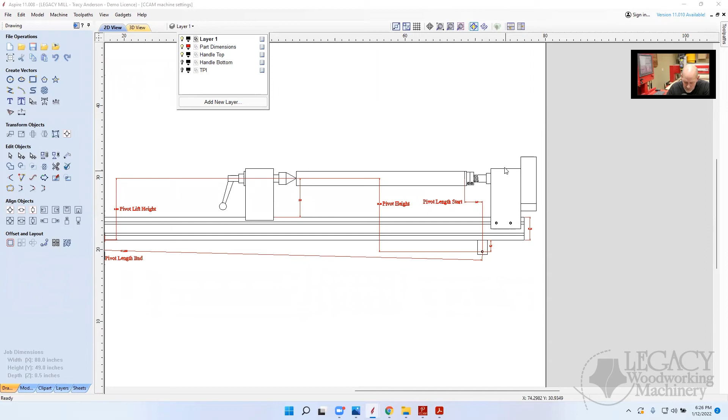And you'll want to double check, the reason that video shows you how to measure from here to here along the x-axis, how to measure from here up to the center here in the y-axis, and all the different dimensions. So watch that video and then double check your values so you get them entered in correctly.

And again, in the 3x5, you'll notice the pivot point is to the right of the part, so the part is positive. And on the 4x8, as we now know, it's negative, because the part is behind the pivot point. Yes sir, appreciate it. Thank you. Okay, no problem.

Hey Tracy, you said that you had an error code, you looked it up there. Do you have a listing of the error codes for the Delta? Because I've gotten a few in the past and I had no clue what they were.

Okay yeah, I did post the error codes for soft limits because that's generally what it is. I'll post the other one too. And again, we put it on our website. Let me share my screen again real quickly, go back into our website.

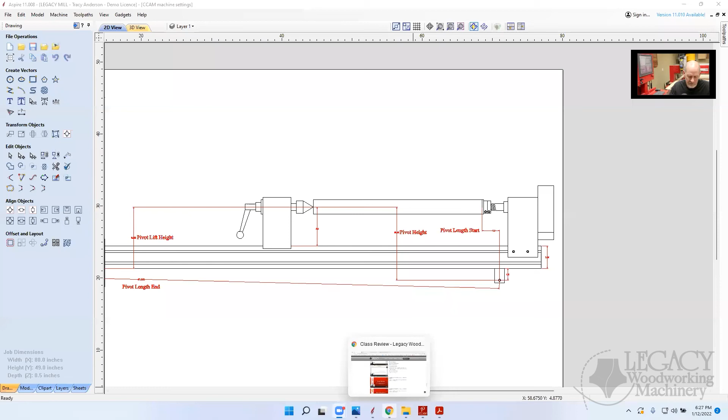Under training customer support files, I believe it's in here. Let me double check. Maintenance schedule router bits, you gotta go to the Maverick 4x8 files. Oh, you're right, so Maverick 4x8. Spire, Maverick, Gemini. No, maybe not.

That'd be something that'd be nice to stick into CCAM so that it'd be available to everybody right off. Yes. Yeah, okay.

Let me go into... is there really 2,000 codes? Okay, let me look, I'll find it for you.

Delta error codes, I will post this one. We were getting error number one, which says file does not exist, and that's okay, so that made sense. I hadn't loaded the file, so of course it couldn't run, but it's pretty extensive, which is one of the reasons I post it all, because it may not make a whole lot of sense. But I'll go ahead and post that up as well.

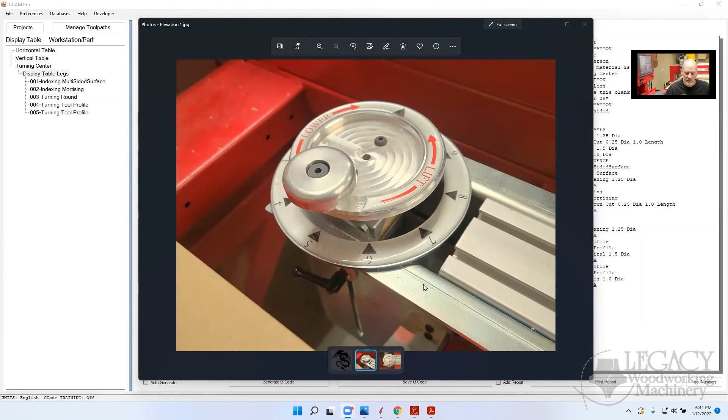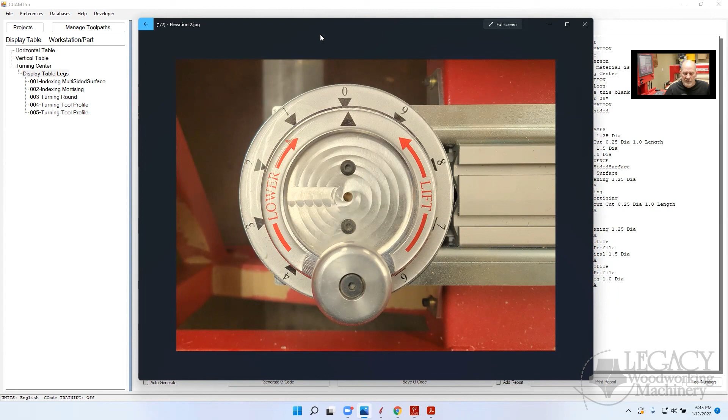The other thing — and again, I'll shoot a video — this has got parallax, this is not correct. When you're setting at zero, these two align. The reason you get parallax is because that ring is down below it, so when you're directly above it, these two align and you'll actually go from point to point. There's really no need to go between, because each tick is only 10,000ths of an inch. So if you're interested in that, go ahead.

Can you put that on the Mark III Gen 2? In the 3x5 Gen 2, or is that just for the Delta controllers?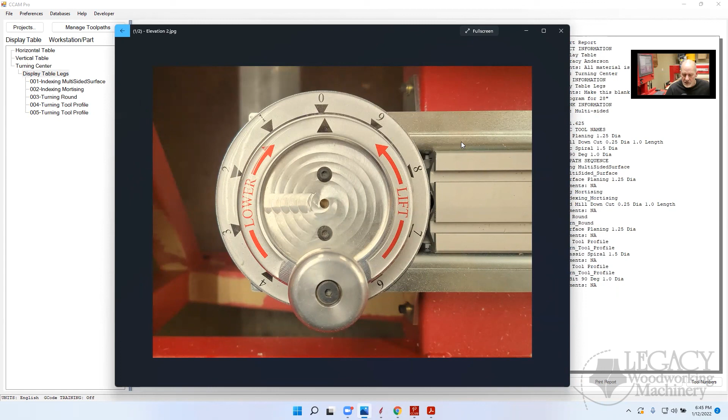Yeah, anyone who has it, it's Mach as well. All of the G-code will generate the number of turns for this particular setup.

The only thing is, if you have an older version, you may not have a 10 threads per inch screw. So in Conversational CAM, both the regular and pro, under the machine database, you'll now have a 'bed adjust TPI' field right here — it's the threads per inch on your bed adjust to raise and lower it. Everything we do now is 10 threads per inch. If you have an older version, it might be a 4 threads per inch Acme screw. You'd just change this field to 4, and the code will generate the proper number of turns for you. It'll do the same thing.

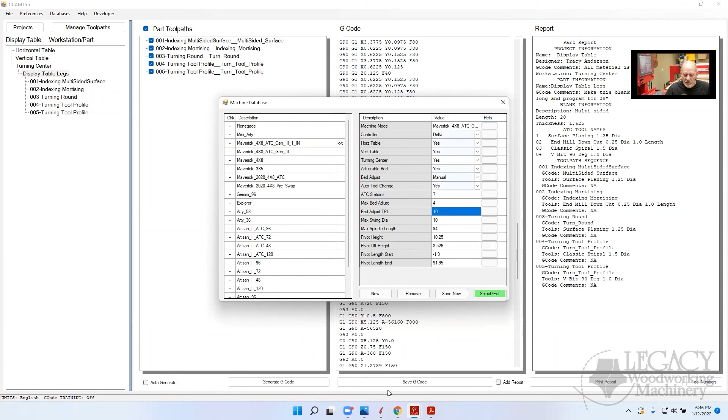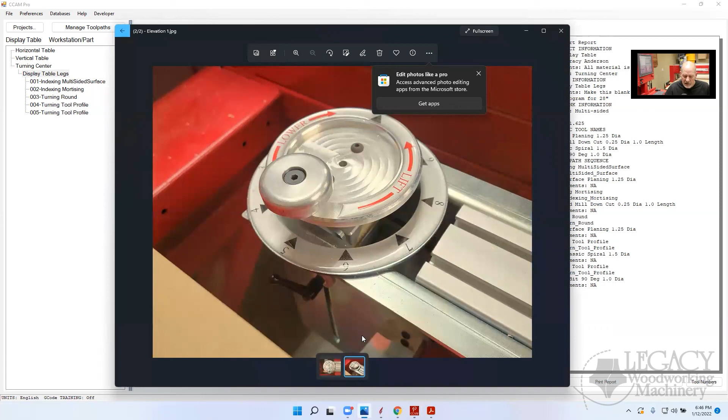So no matter which screw you have, the only thing that's critical is that you have this type of adjustment with the hand wheel on top. If you've got an older machine, like an Arty, with a wheel and handle underneath, this won't work — it'll only work on Mavericks, 3x5s, 4x8s, and the new stuff. So if you've got this type of handle, you can add this ring and the decals.